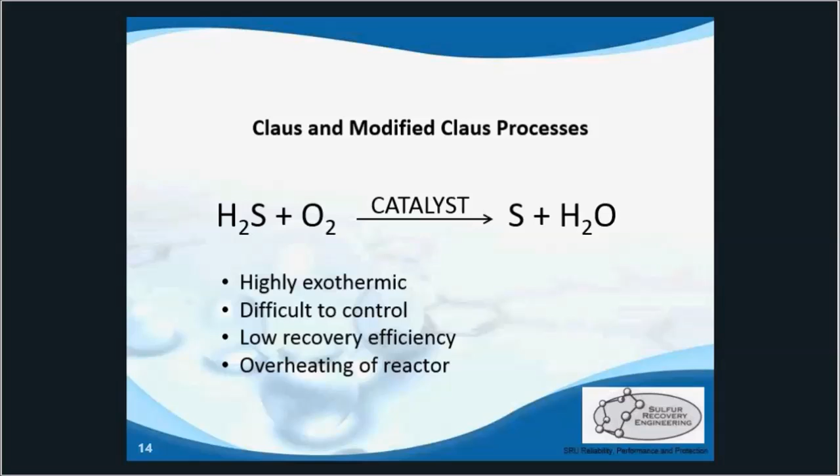So, enter the modified-Claus process. This includes a highly exothermic thermal combustion reaction, followed by a moderately exothermic catalyst reactor section. And there's various configurations of this. They're a function of acid-gas feed compositions, minimum recovery efficiency, and maximum throughput. Also, the available utilities will depend on what kind of setup you need.

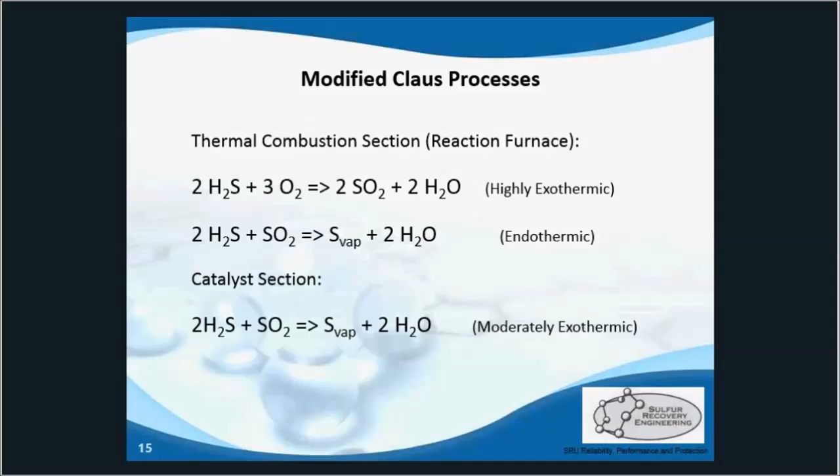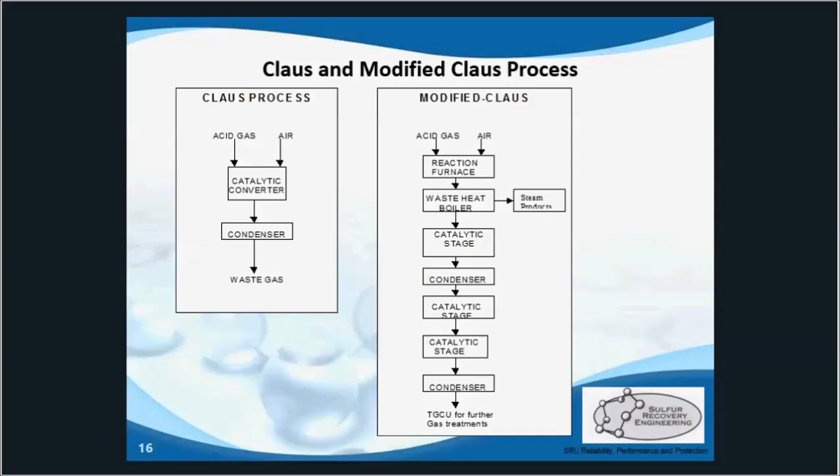So this is a comparison, kind of basic flow chart between the Claus process and the modified-Claus process. You can see with the original Claus, it's just one vessel. The furnace is actually within the same converter vessel there, but it's just that one thermal reaction going on. And then we see with the modified-Claus process, we have the reaction furnace where the thermal reaction takes place, but then we have at least two more catalytic stages after where the catalytic reaction takes place.

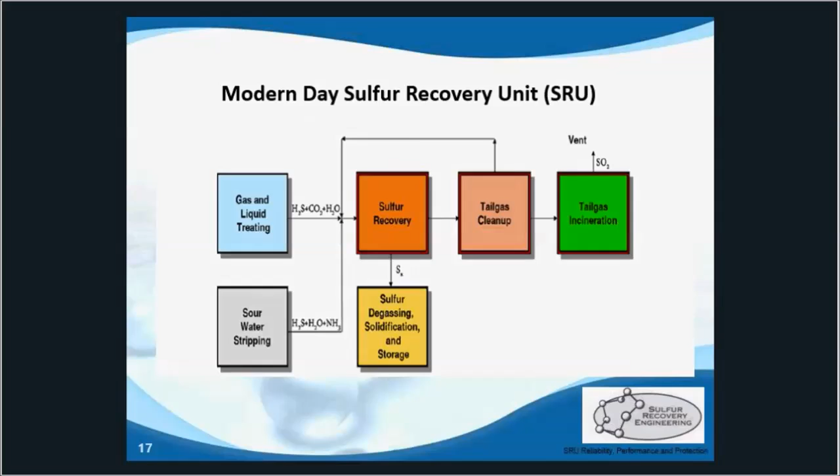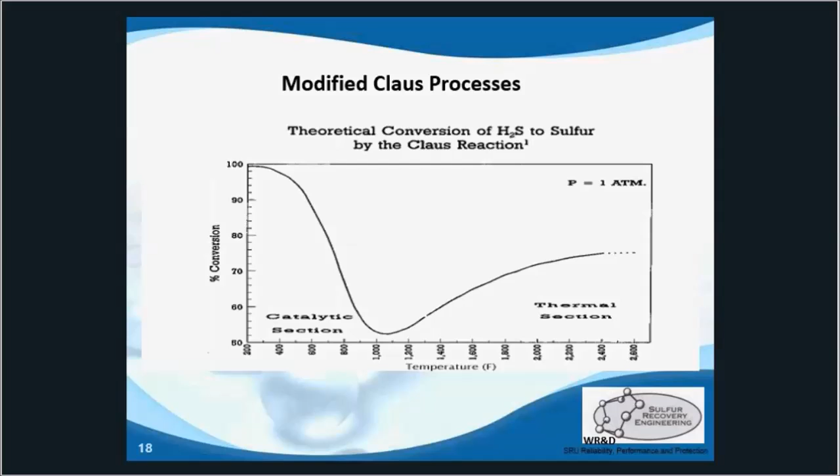Now we have a graph showing the temperature versus the conversion efficiency for the modified-Claus process. And we can see here that for the highest recovery efficiencies, the Claus reaction is favored with a decreasing temperature. So what is recovery efficiency? It is the amount of H2S that's converted to sulfur vapor and subsequently recovered in the condensers as a liquid. So it's our conversion efficiency, minus our sulfur vapor and any entrained liquid sulfur.

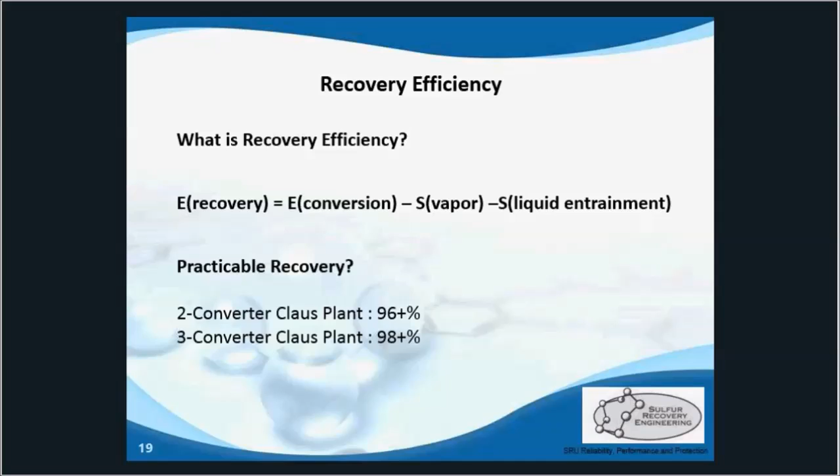Now, a two-converter Claus plant should achieve at least 96% recovery efficiency. And then if you add another converter for a three-stage, we should achieve 98 at least. Now, I'll talk about the main potential losses to recovery efficiency. So we have catalyst deactivation, and that can be thermal, mechanical, or chemical. It can be from soot or fouling. It could be from sulfation, or you could have poisoning from BTEX breaking through into your converter.

Also, off-ratio control is a big one. It has to do with the tail gas analyzer and air demand analyzer, which we'll get to. Excessive converter dew point margins. We want to maintain a nice little 10 degrees centigrade margin above the dew point temperature in converters 2, 3, or 4. Converter 1 will run hotter so that we can promote hydrolysis of COS and CS2. Which brings us to the next potential loss. If we have poor hydrolysis, that's a major contributor to losses.

Then a poor operation of the demister pad will create sulfur fog, and this is also a big contributor to losses to our efficiency. And we also want to keep that final condenser outlet temperature to about 125 degrees Celsius. And anything higher, and you will notice losses due to vapor carryover.

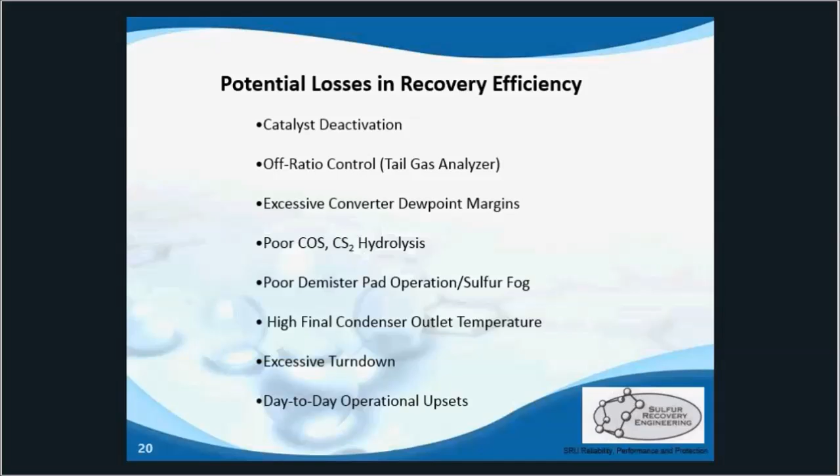Excessive turndown is also a major one, especially nowadays. We're seeing more of this. The sulfur plant doesn't like to run when the feeds are turned way down or we have poor quality feed streams. It has a hard time running way below design capacity. And then our day-to-day operational upsets, which can really cause any of the above losses to happen.

So some configurations, we have straight through, we have the split flow, and then we have other things like sulfur recycle and direct oxidation. And these all depend on the amount of H2S in the feed stream. A split flow process may be preferred over a straight through one if the H2S concentration is less than 50%.

And this is where 1/3 of the acid gas is burned in the furnace, and then the other 2/3 will bypass it. So with that split flow design, that 1/3 going through the furnace is actually completely oxidized into SO2. And then that sets us up with the nice 2:1 H2S to SO2 ratio for the first converter. And that's key. So these are so we can achieve the proper reaction furnace temperature and then still get our 2:1 ratio. And it's all dependent on the acid gas quality.

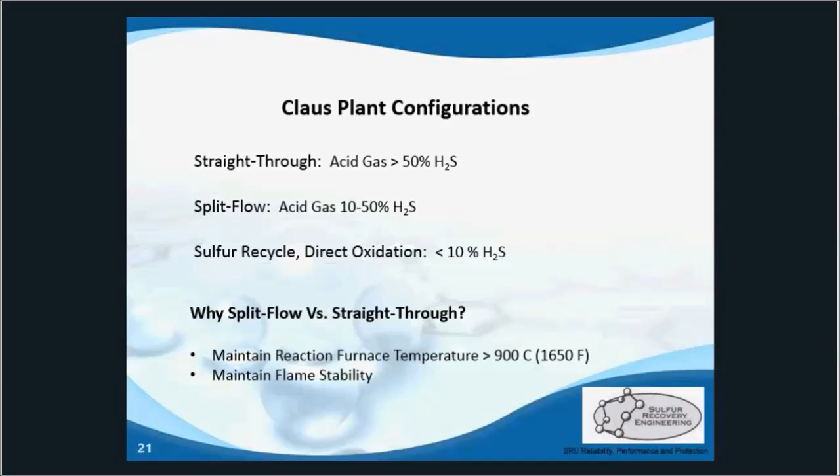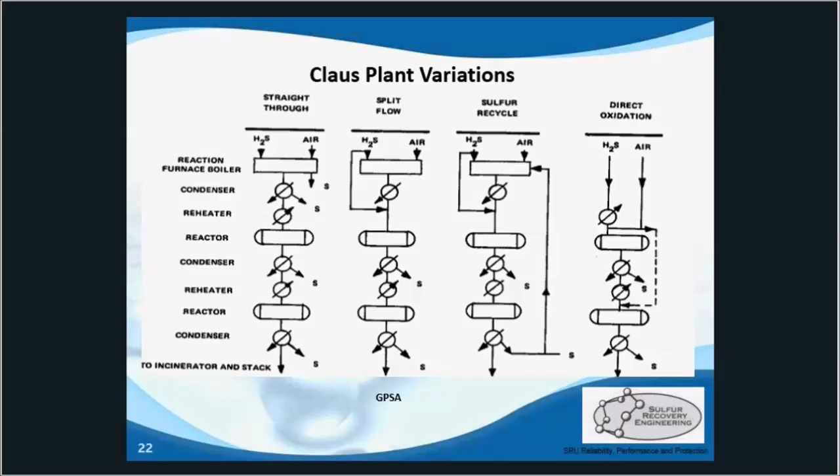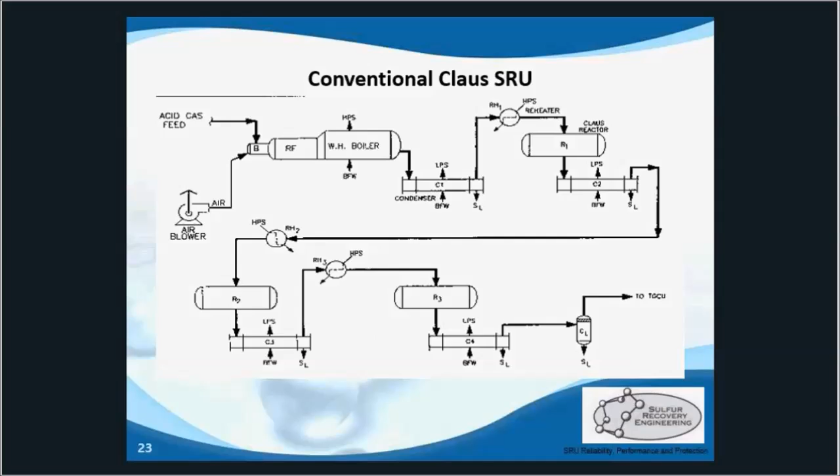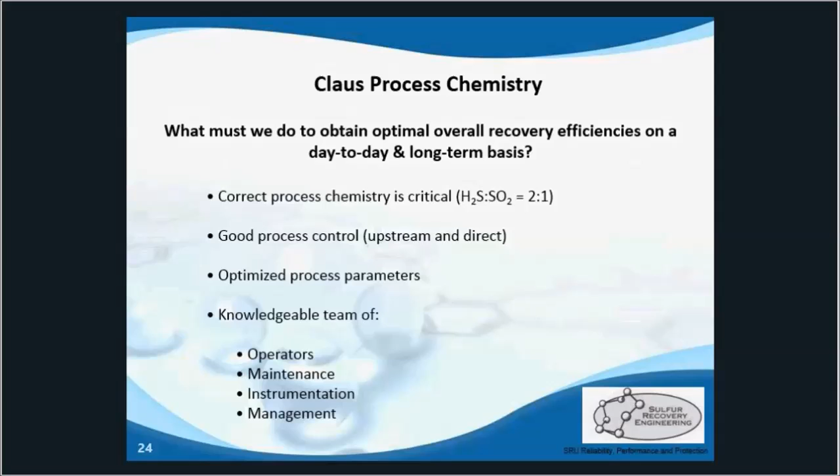And then we also need to optimize our process parameters. And mainly that includes temperature. We want to make sure our reheaters are all achieving the right temperature for our converter inlets. We want to make sure our condensers are cool enough to condense all the sulfur that we can and minimize vapor carryover. Then lastly, we need a knowledgeable team of operators, maintenance, instrumentation, and management. They're all equally important in ensuring the performance of the SRU is good.

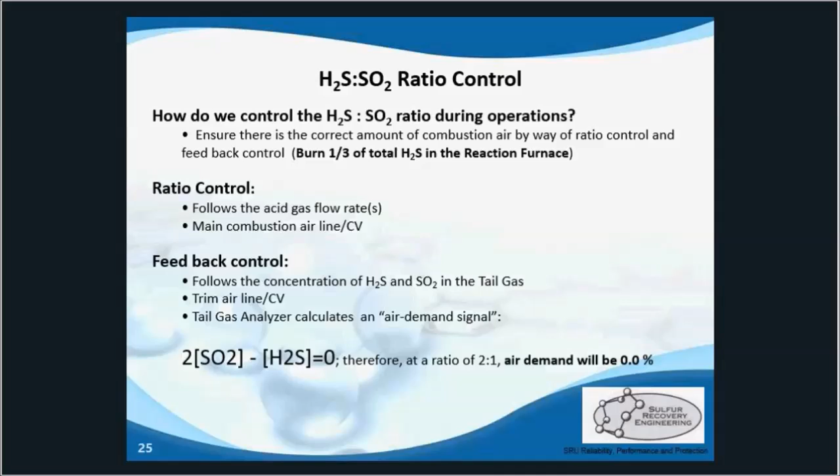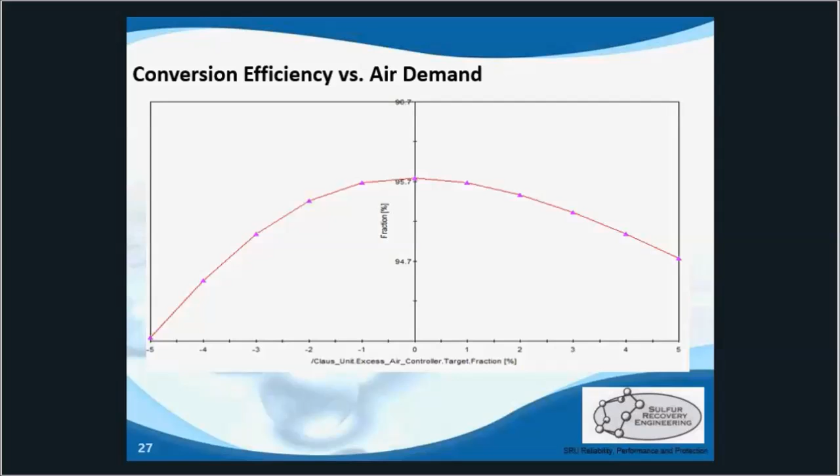Okay, so this page, we have the conversion efficiency versus the air demand signal. So the key takeaway from this graph is that any time the air demand signal goes outside plus or minus 0.5%, there will be an immediate loss in recovery efficiency. And it doesn't take much to get outside that range, so we need really smooth process control, and we hope our feed streams are consistent. Another takeaway is that the recovery loss gets a lot worse when the air demand goes negative. And a negative air demand occurs when the ratio gets too high.